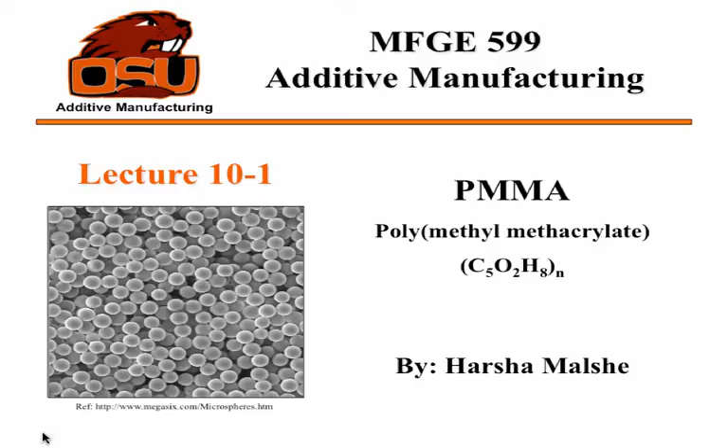So PMMA, as I said, it's lightweight, high mechanical strength, shatter resistant, and it's an economic alternative to polycarbonate. And again, it's biologically compatible.

So I'm going to talk about some applications. It's been used widely, but I'm going to talk about specific applications to additive manufacturing. And so those include

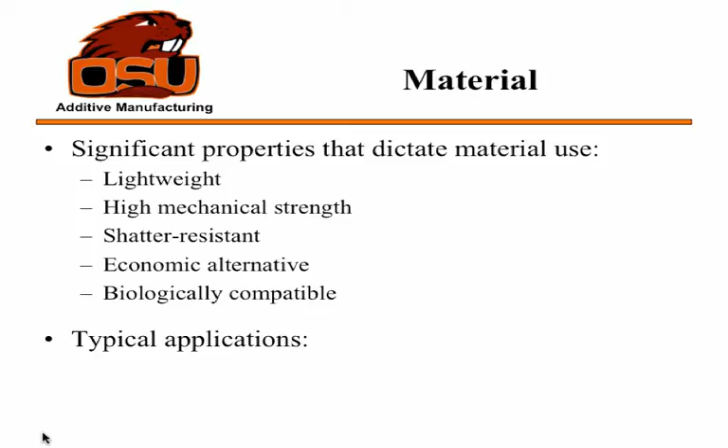lost molds for investment casting. These are biological beads that surgeons can embed after they've done surgery to deliver medicine over time, and the body will actually reabsorb that material. And again, the porosity and the low absorption of the PMMA is actually what makes that very friendly for these

type of applications. Here's a cranial implant that was recently designed and fabricated using additive manufacturing, which replaced a patient's skull. I'll talk about that a little bit later.

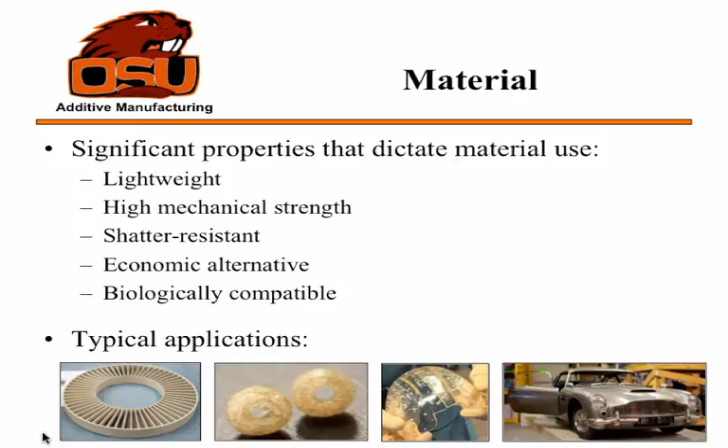This is the Aston Martin developed for Skyfall, the last Bond movie, and this was actually much cheaper to make and then blow up for special effects than the really expensive ones they used before.

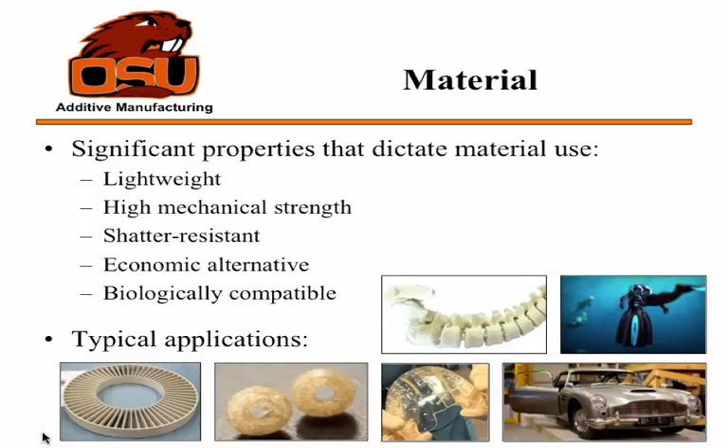This was a backbone that was developed to study the methods of operating on spinal cords. And this is a prosthesis developed for amputees to be able to swim, and they can actually swim much faster.

This was made using PMMA, architectural models, and actually this guy in Germany is building entire furniture sets out of PMMA. And you can have really cool looking furniture in your house. So there are a lot of things you can do with it.

We've been doing a lot of stuff in the past, but now with additive manufacturing we can do a lot more. Here's some material properties.

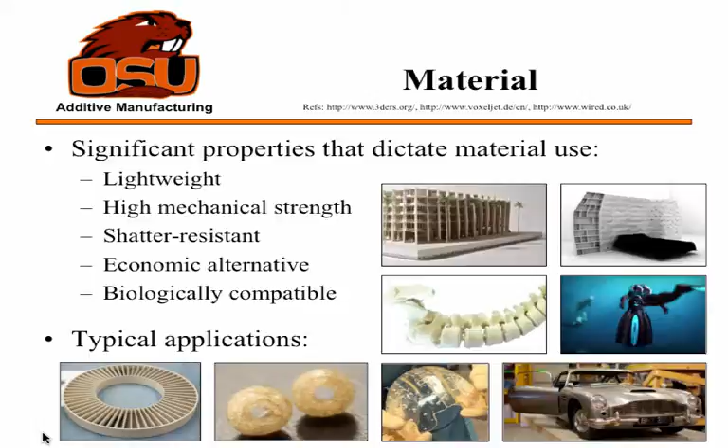I actually had to go through some literature and compile this myself, but as you can see, compared to conventionally manufactured plexiglass or PMMA, additive manufactured PMMA is not that great. But for the applications they're looking at, functional prototypes and biological applications, it actually performs well enough.

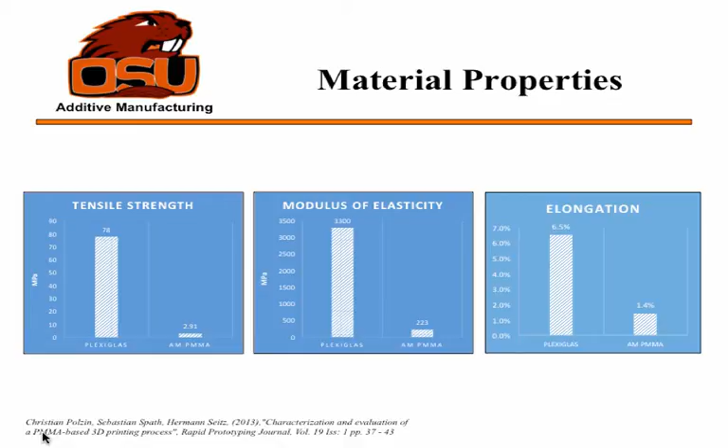So while I wouldn't make a window out of it, I could still put it in my body, and I think that's a good takeaway from this.

So one of the biggest vendors of this powder, Sigma Aldrich, all types of companies make PMMA powder, and we saw that in the first slide. But Voxeljet is a company founded in Friedberg, Germany.

They're the largest manufacturer of machines, industrial size, and also the powder. So here are the typical characteristics of the particles they make. So that's particle size and the binder types they use.

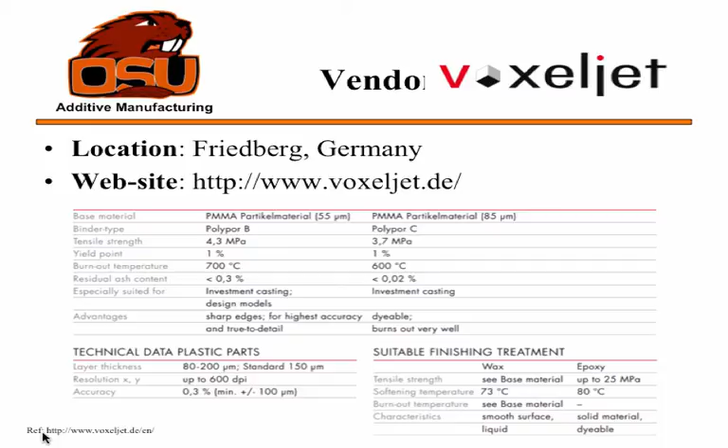So primarily, actually only, they do binder jetting. And binder type B for some reason is only available in Europe. But a lot of these are used in casting and production of functional prototypes, as we see.

So case study 1, Schmolz Bickenbach is a leading metal manufacturer, casting specialty company in Germany. Again, they use powder-based binder jetting to produce this Francis wheel. So it's an investment mold. It's a lost mold to produce FEAD brackets, powertrain components, gearboxes.

Additive manufacturing really helped because they needed the molds to be detailed, precise. It really helps save time and cost in making these models. The strength was comparable to the wax models they were making first.

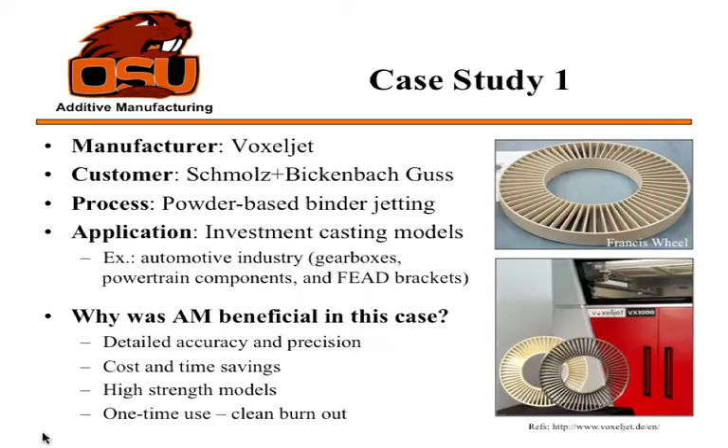What they do with these models is they'll make them and they'll dip them in wax, and then they'll put them in the kiln, burn out that mold, and actually, because the PMMA shrinks, it doesn't break that ceramic coating. So the mold is really, really good, as we'll see in the video on the next slide.

So here's the process, and I'm going through the company, and this is a different type of parts they've made. I'm going to skip ahead to the actual printing process. So here, there's the binder jetting process. They're building up that investment lost mold for that Francis wheel.

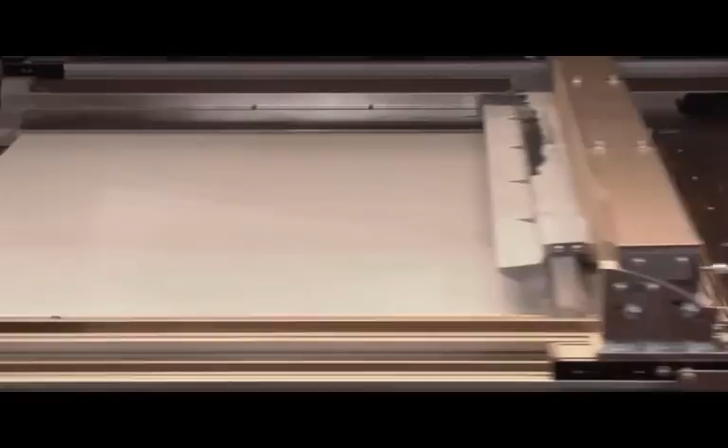Let's skip ahead. All right, so she's removing the powder. Again, we've seen that before.

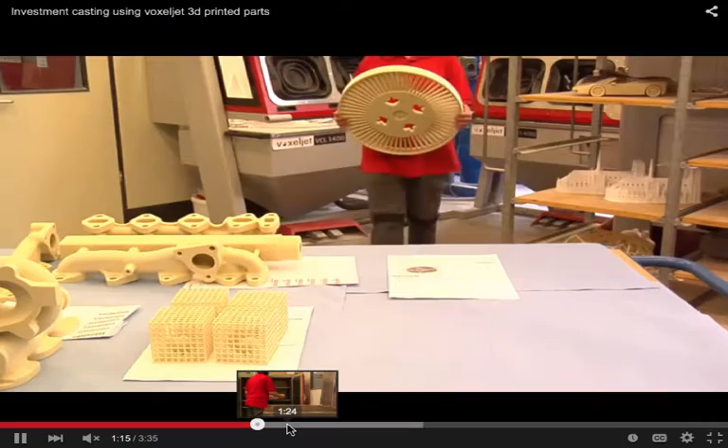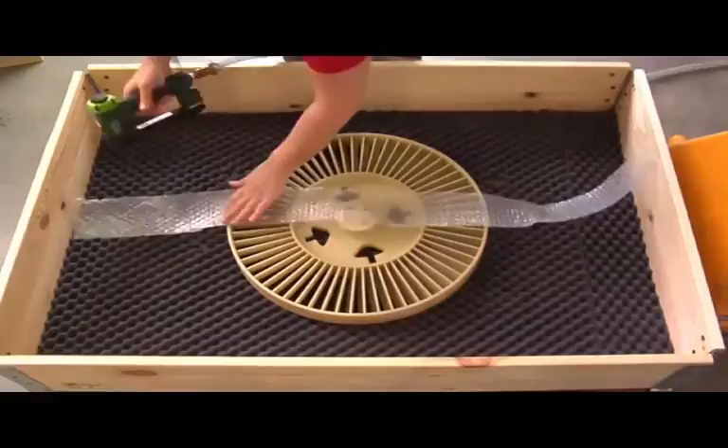Once that process is done, they're going to take it and dip it in wax. This essentially seals the mold. For the molds they'll actually use to do the burning out, they'll infiltrate it with wax. So some of the prototypes they'll only coat, but the ones they'll use they'll infiltrate.

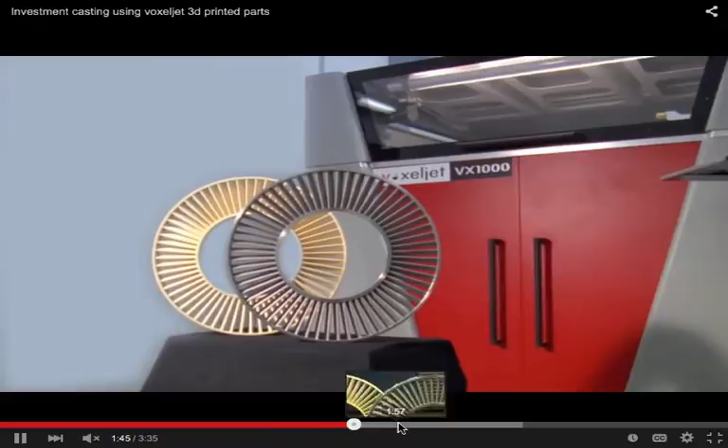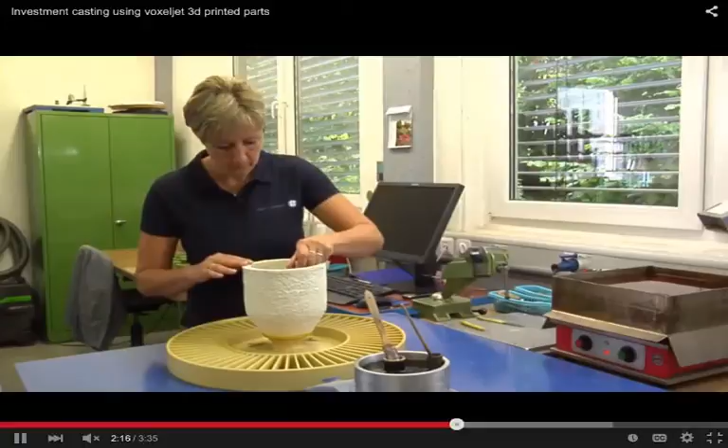Once they do that, let's skip ahead a little bit. So the customer receives it like this. She'll inspect it, and then she'll start coating it in this ceramic support. They'll do it by hand at first, and then they'll do it by machine.

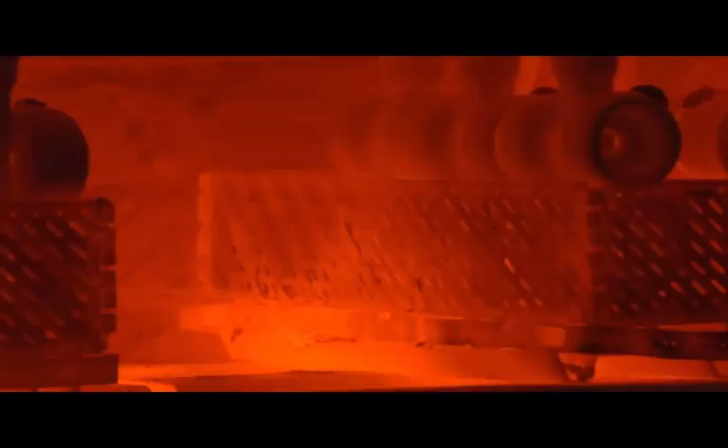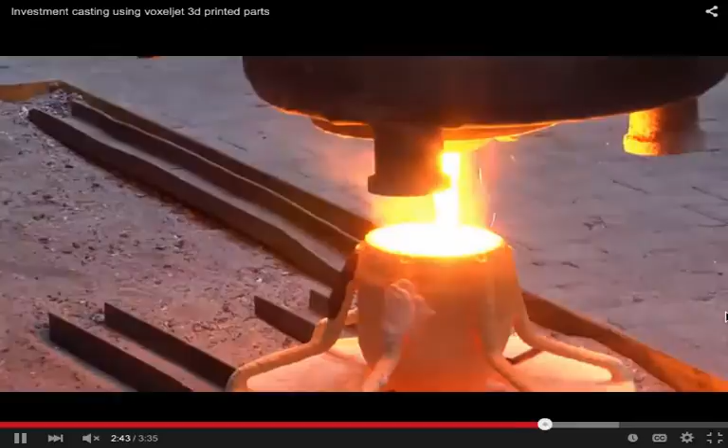Once they do that, they'll burn out that model - that's why it's called a lost model, right? They burn out the model they built initially, then they're going to let it cool, and then pour some molten hot metal in there.

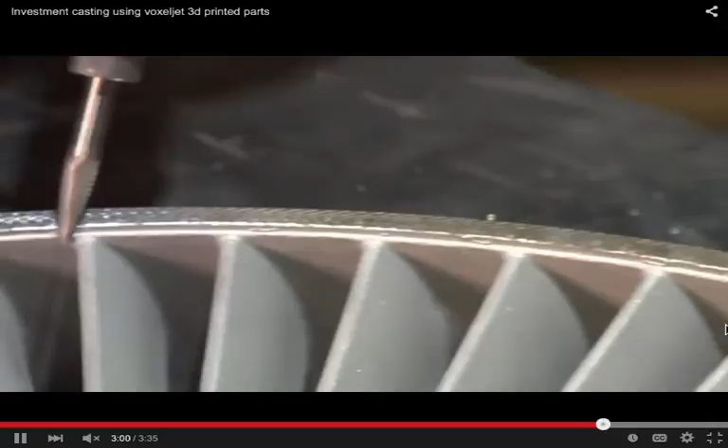Eventually, you get something that looks as nice as this. Obviously, there's some post-processing involved, but as you can see, it's a very good application of additive manufacturing, saving a lot. Here's the process: they're pouring metal in, post-processing, and you get the final part.

Next case study was by a company named Anatomics for the University Medical Center in Utrecht, Netherlands. They used, again, the binder jetting process to make this cranium replacement.

There's a disease among Dutch folks where your cranium, your skull, grows too thick. It won't stop growing, and if this continues to happen, you'll lose brain function. They used additive manufacturing to replace her skull completely.

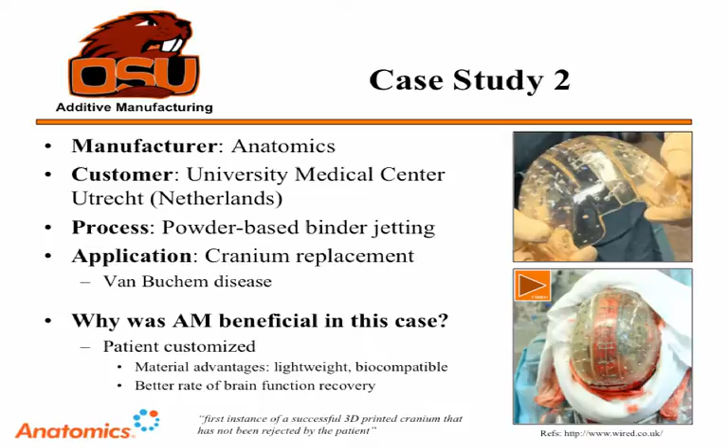The advantage here, again, is it's biocompatible and lightweight. Compared to the previous bone cement implants they used, the rate of brain function recovery was actually much faster. This was the first instance of a successfully 3D printed cranium that had not been rejected by the patient. That's really a big deal - we're able to put these in our bodies and improve the way we live, and I think that's very exciting.

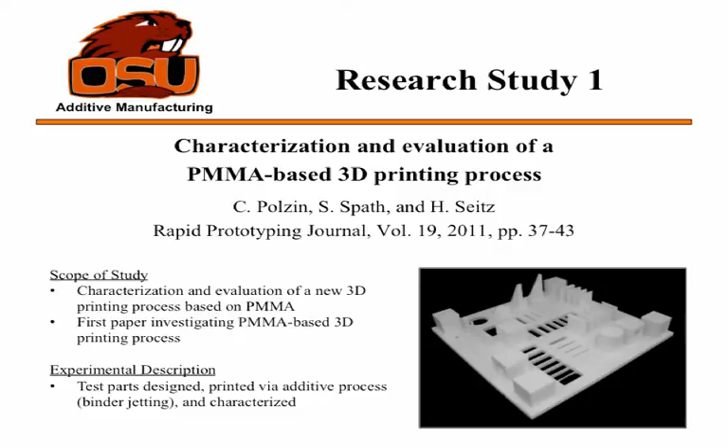The first research study I looked at evaluated this binder jetting process. They created this part, as you can see on the right, and tried to evaluate it based on different process parameters. They asked: how do the mechanical properties compare to conventionally manufactured PMMA, or plexiglass?

I don't know if you can see very well, but as you can see, plexiglass outperforms most additively manufactured PMMA, but wax infills and epoxy, which is on the right there, really improve the properties overall.

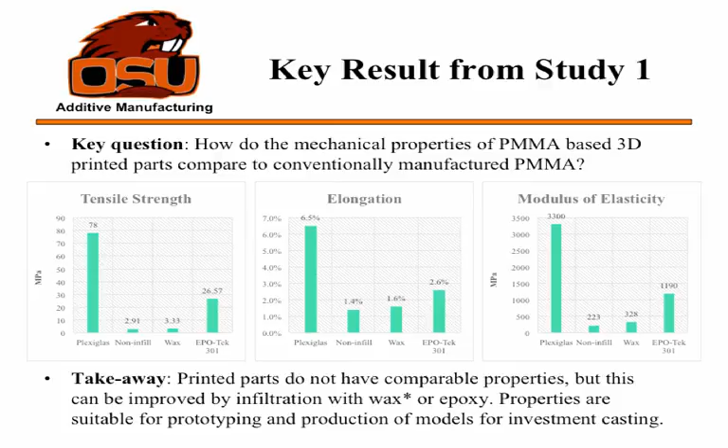So as you can see, it's not as good to make windows out of, but something you could still use to strengthen. Wax actually gets you a better surface finish, so if you're looking for surface finish, wax is useful. As you can see, the epoxy infill performed the best overall.

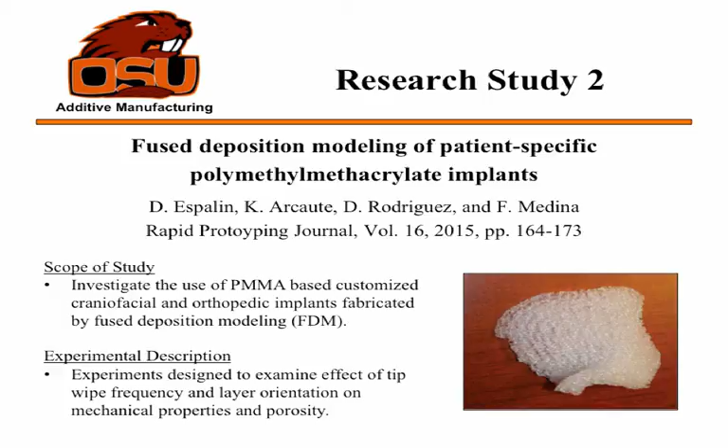The second study we're going to look at is FDM, where they did customized implants for the cranium. You can see the image - that's the model they built out of ABS, and this is their porous implant, and this is the model with the implant on the skull.

They wanted to investigate the use of this - what the effect of tip wipe frequency and layer orientation would be on the mechanical properties, and importantly, porosity, because porosity is a key factor in muscle growth and bone growth. It really helps biocompatibility of these implants.